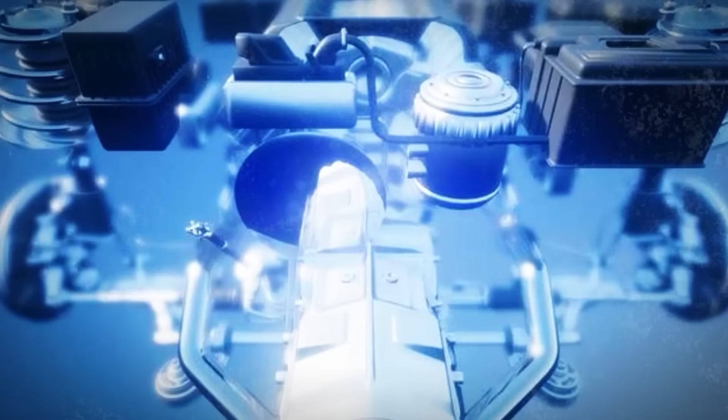Elon Musk has just unveiled a new game changer, a water engine that could completely change the way we drive and live our lives. He made this shocking revelation on X, where he announced that Tesla has made a big change.

That Tesla is shifting gears. Instead of sticking to battery-powered cars, they are now betting big on hydrogen fuel cells. Elon Musk's move has companies all over the world watching closely.

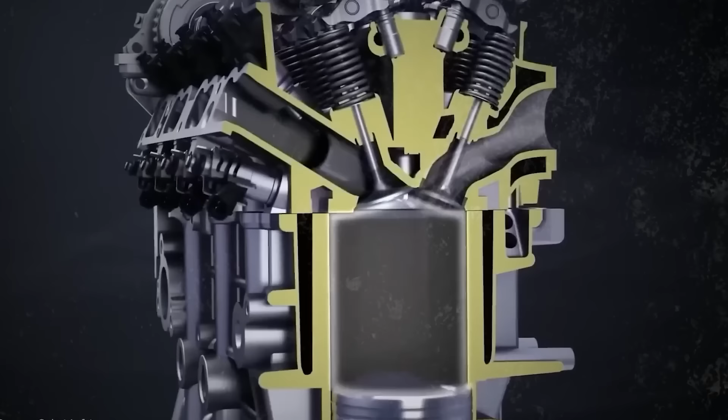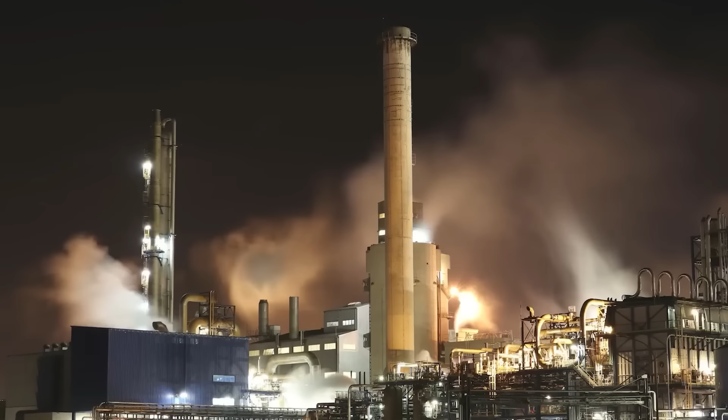This decision comes at a time when Tesla is facing challenges in mass-producing its 4680 battery cells, forcing the company to look for alternative sustainable energy solutions. So Musk is on a mission to find new, greener energy solutions. And the best part? He is introducing Tesla's water engine, which he says will be the star of this eco-revolution.

What's so amazing about this water engine? How will it shake up our world? Stay tuned. We're going to break down Musk's new brilliant move step by step and show you why it's such a big deal. Could this give the car industry a boost? Or maybe even a bigger change?

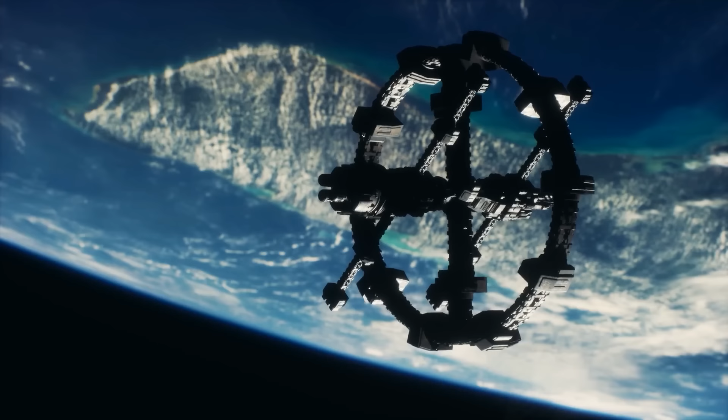Elon Musk, the big brain behind Tesla and SpaceX, is all about dreaming big and saving the planet. He's obsessed with inventing cool tech that makes life better while keeping Earth green. Musk doesn't just think outside the box. He smashes it, pushing the limits of what anyone thought was possible and earning his spot as a real-life trailblazer.

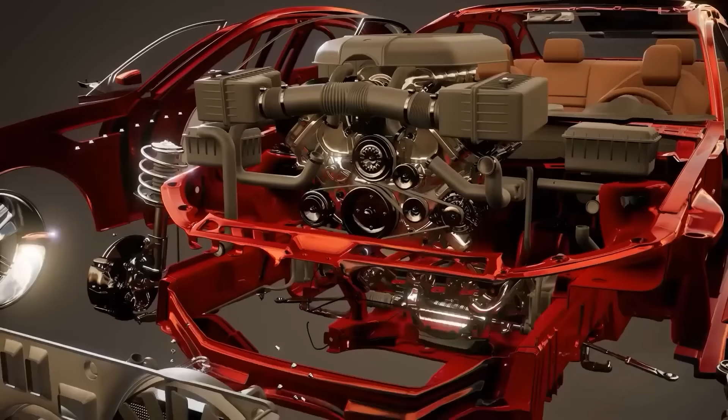With Tesla, Musk didn't just want to build electric cars, he wanted to flip the whole car world upside down. His plan? Prove that electric rides could zoom faster, stay safer, and be way more fun than gas guzzlers. But it's bigger than just cars. It's about turbocharging the world's switch to clean energy.

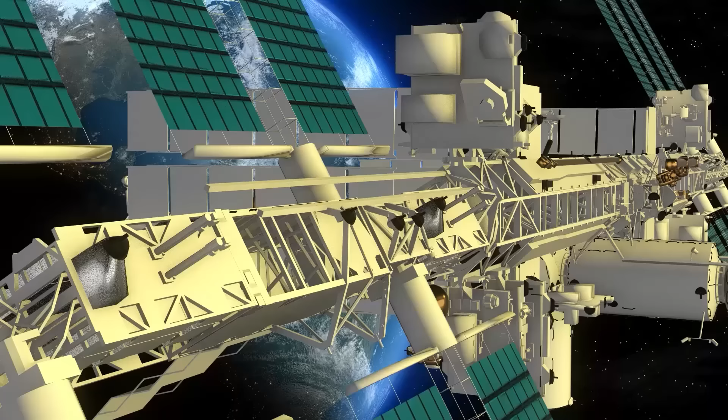And with SpaceX? Oh, he's shooting for the stars, literally. Musk's dream is to make space travel cheap and easy, with the ultimate goal of setting up camp on Mars. Thanks to SpaceX's wild wins, like landing rockets and using them again, he's already shaking up the space game and turning his crazy ideas into real stuff.

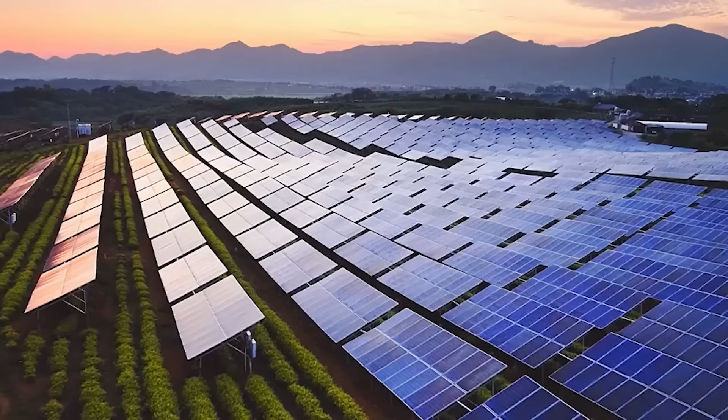Musk's adventure in green energy and transportation has some epic highlights. Take Tesla, kicked off in 2003. Back then, people laughed at electric cars, calling them slow and useless. But Musk? He just kept driving forward. Elon Musk didn't give up, and boy did it pay off.

Tesla's first big hit, the Roadster, zoomed onto the scene and showed everyone that electric cars could be fast, fun, and go the distance. Then came the Model S, Model X, Model 3, and Model Y, each one upping the game with better batteries, longer ranges, and even cars that can drive themselves a bit. Tesla's now the king of electric vehicles, making them totally practical for everyday life.

But Musk's not just about cars. He's got a green energy master plan. Tesla's Powerwall and solar roofs let homes and businesses soak up the sun's energy and store it smartly, cutting the cord from dirty fossil fuels.

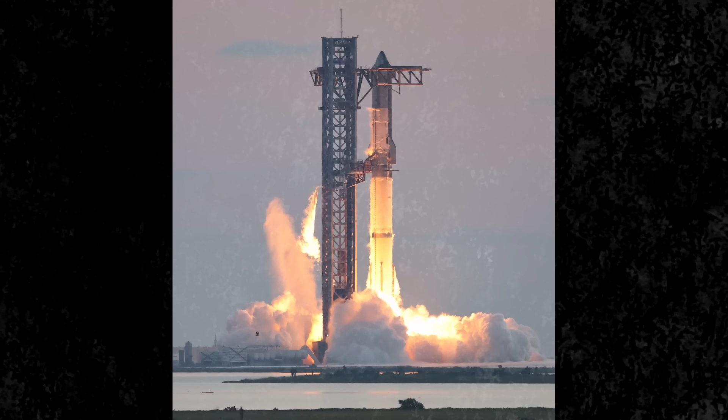And in space, SpaceX is crushing it. The Falcon 9 rocket lands and flies again, slashing the cost of space trips. Plus, Starlink's satellites are beaming internet all over the globe. Musk's basically rewriting the rules of tech.

Now, let's talk about his wild new water engine. It's super simple but crazy smart. It runs on water to make energy. Unlike old-school engines that burn gas or electric ones that need batteries, this one's different.

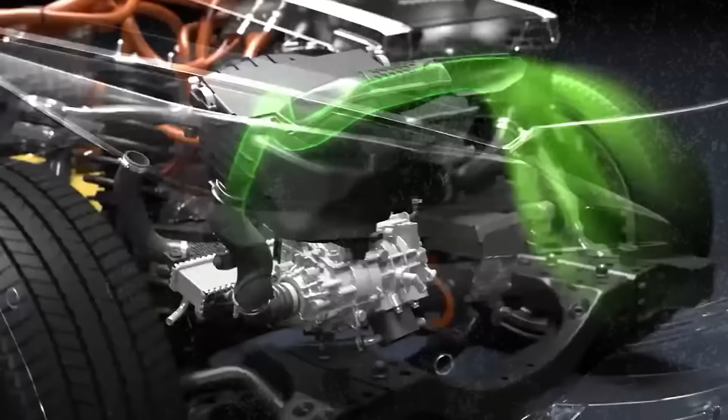How? It uses something called reverse electrolysis. Normally, electrolysis splits water, H2O, into hydrogen and oxygen with electricity. This engine flips it, mixing hydrogen and oxygen to create power, with nothing but water vapor left behind. Clean, green, and genius.

So, how does this awesome water engine actually work? It's like a magic mix of fuel cells, reverse electrolysis, and some hydrogen-oxygen teamwork. Let's break it down super easy.

First, you pour water into the system. The engine uses a little zap of energy to split that water into hydrogen and oxygen, then stores them in separate tanks inside the car.

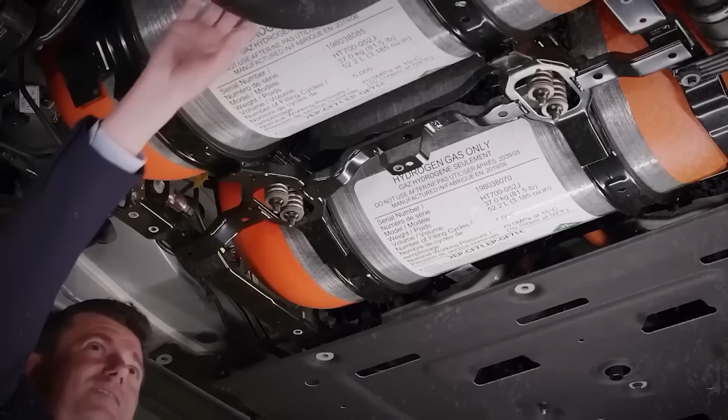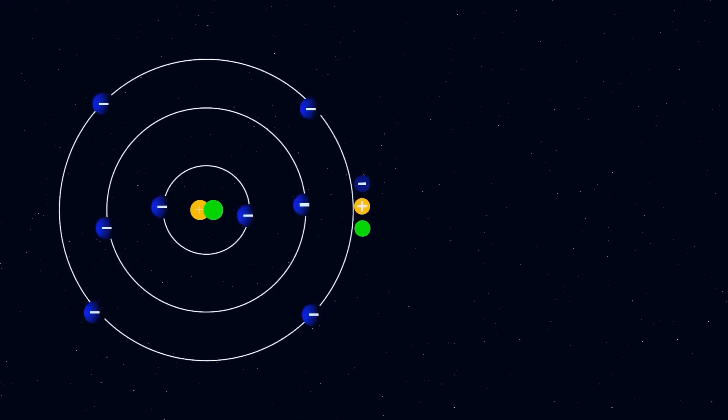When you hit the gas, hydrogen flows into a fuel cell. There, it gets split into tiny protons and electrons. The electrons zip around to make electricity, which powers the car's motor. Meanwhile, the protons sneak through a special layer, team up with oxygen from the air, and out comes water vapor. That's it, no nasty fumes, just clean steam. This setup keeps pumping out power as long as there's hydrogen and oxygen ready to roll.

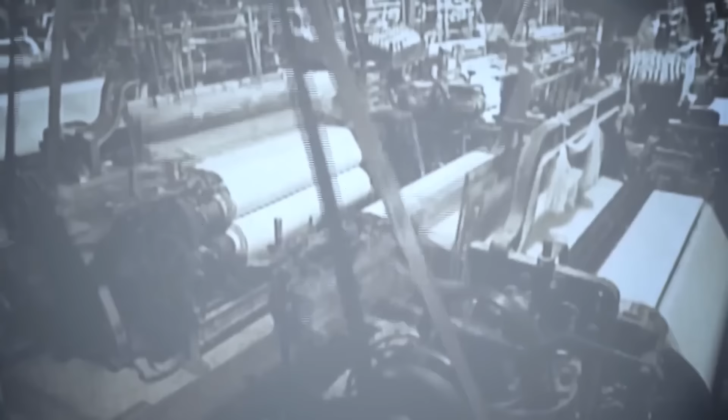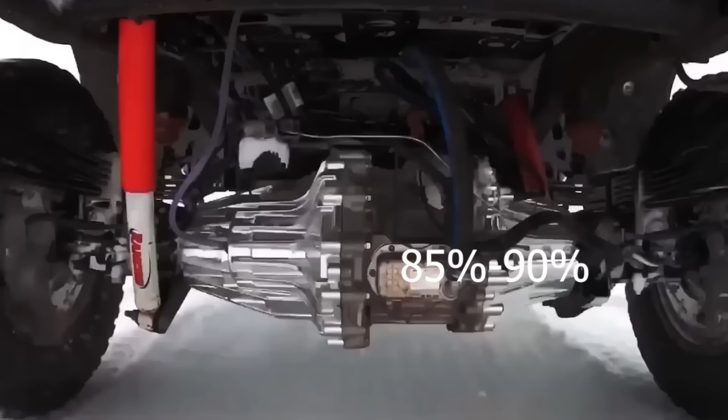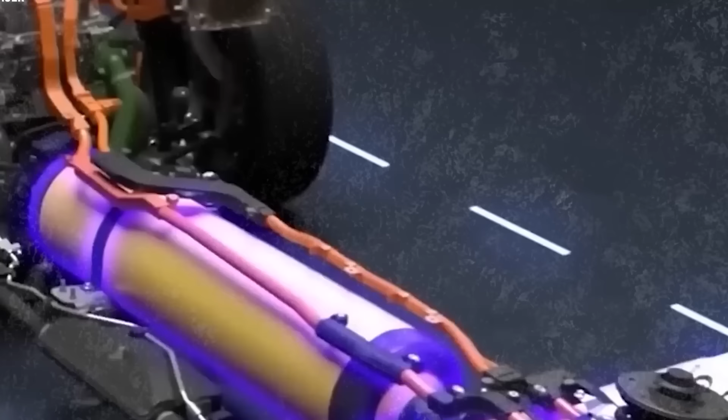But how does it stack up to other engines? Pretty darn well. Old-school gas engines only use about 20 to 30% of their energy, most of it just turns into heat. Electric engines are champs at 85 to 90%, but they've got downsides like slow charging and batteries that wear out. The water engine hits around 60% efficiency, right in the middle, but it's way cleaner and greener.

What about how far it can go? Regular electric cars often leave you sweating with range anxiety, topping out at 200 to 300 miles per charge. But the water engine, powered by hydrogen's big energy punch, can match or even beat gas-powered cars for distance. Picture this: you're cruising in a car that only puffs out water vapor and never leaves you stranded mid-trip. How cool is that? So what makes the water engine so special?

Unlike electric cars that need ages to charge, this baby refuels fast, like filling up a gas tank. That speedy pit stop, plus its planet-saving perks, makes the water engine a total game-changer for cars.

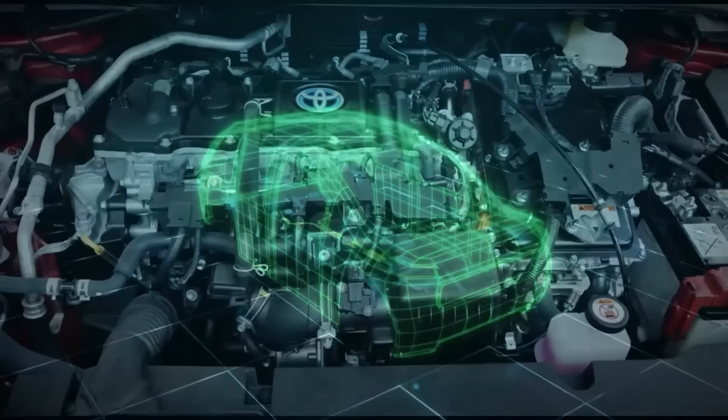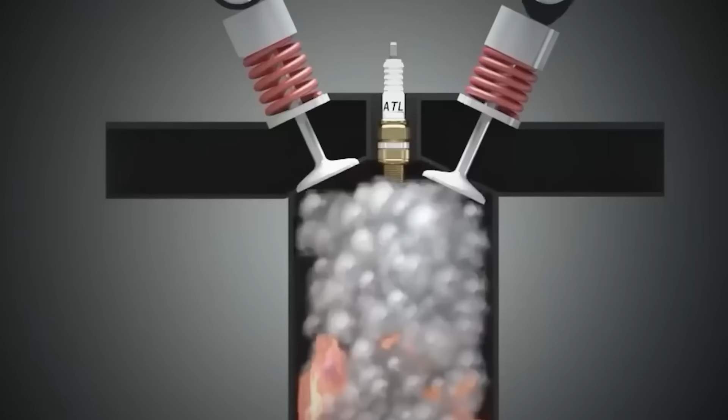Here's the big win: it could shrink our carbon footprint to practically nothing. Regular gas engines spew out tons of carbon dioxide, about 4.6 metric tons per car every year, plus other nasty stuff that heats up the planet and dirties the air. The water engine just gives off water vapor, super clean and guilt-free. Switching to it could wipe out those emissions completely. Plus, it ditches other gross pollutants like nitrogen oxides and tiny particles, making city air way fresher.

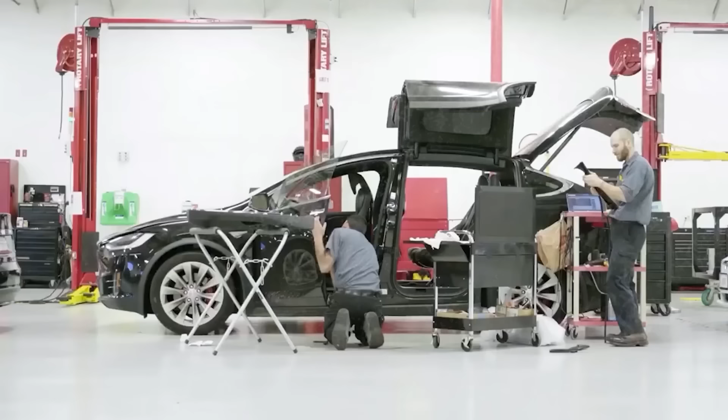Electric cars, EVs, are cleaner than gas guzzlers, sure, but they've got their own baggage. Digging up lithium and cobalt for batteries messes with the environment, and if the power to charge them comes from dirty plants, you're not saving as much carbon as you'd hope. Hydrogen fuel cells are another green option, also making just water, but creating hydrogen often uses natural gas, sneaking in some carbon emissions. Plus, storing and moving hydrogen is tricky because it needs big, high-pressure tanks. The water engine, though, it's stepping up as a cleaner, smoother ride into the future.

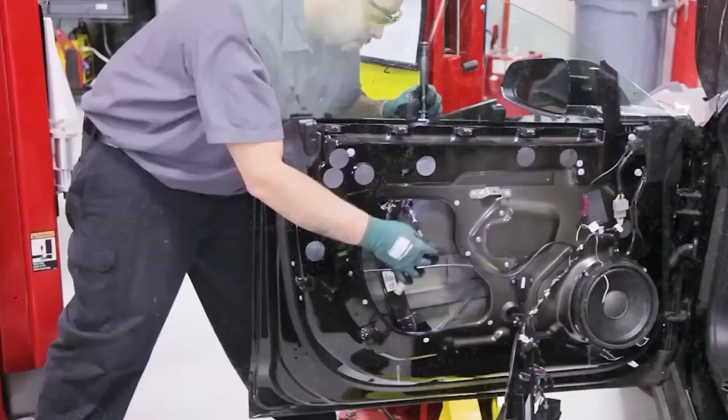The water engine, with its reverse electrolysis trick, could be a total win, super efficient and kind to the planet. By using renewable energy, like solar or wind, to make hydrogen, it keeps the whole process green from start to finish, slashing its eco-footprint. Plus, it could save you some serious cash over time.

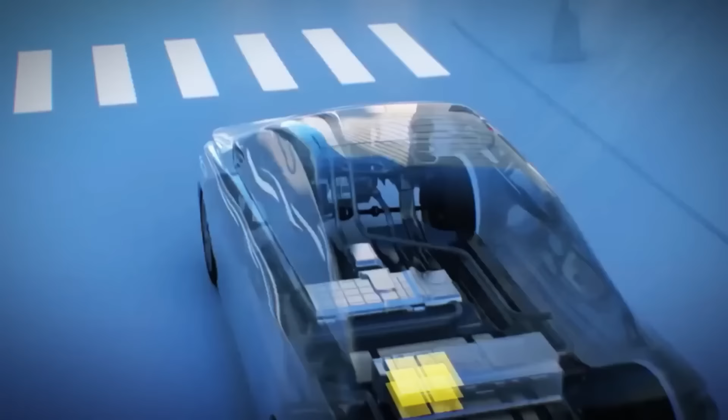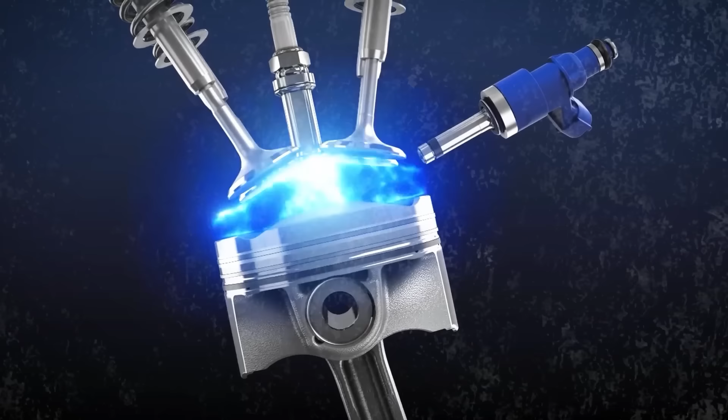Old-school gas engines need constant tune-ups, oil changes, exhaust fixes, you name it, which adds up fast. Electric cars cut down on repairs with fewer moving parts, but those pricey battery swaps can sting your wallet and the environment. The water engine? It's simpler, with less stuff to break, so repairs could be cheaper and rarer. Its fuel cells and systems are built to last, meaning your car might stick around longer. As more people jump on board and the tech gets cheaper to make, water engine cars could become affordable for everyone, not just the fancy folks.

But here's the catch: switching to water engines won't be cheap or easy at first. We'd need a whole new setup of refueling stations, either brand new ones or upgrades to the ones we've got. That's a huge project, and it'll take big teamwork between companies and governments to pull it off.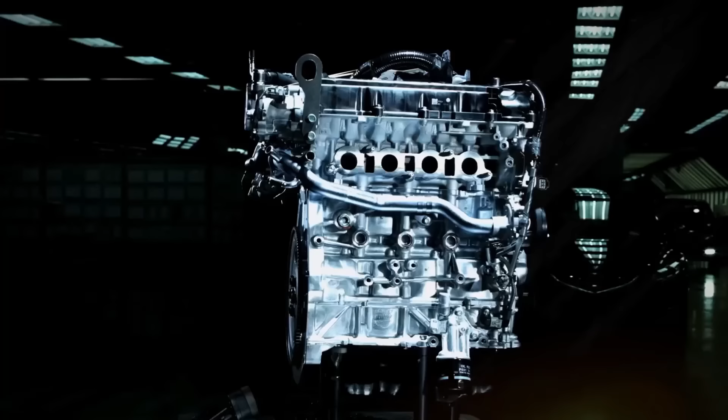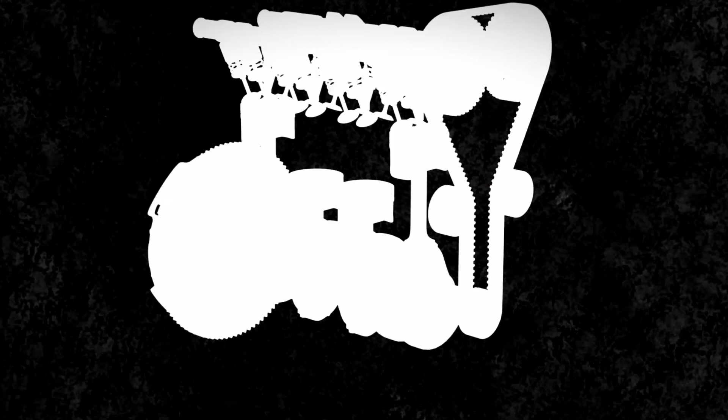On the flip side, if we make it work, we could kiss oil goodbye. That means steadier fuel prices, less fighting over oil, and tons of new jobs building water engine tech and stations. This is a massive shakeup for the car world, moving from gas guzzlers and electric rides to water-powered wonders. It's not simple, though. The whole industry's built around fossil fuels, from factories to gas stations. But here's the good news.

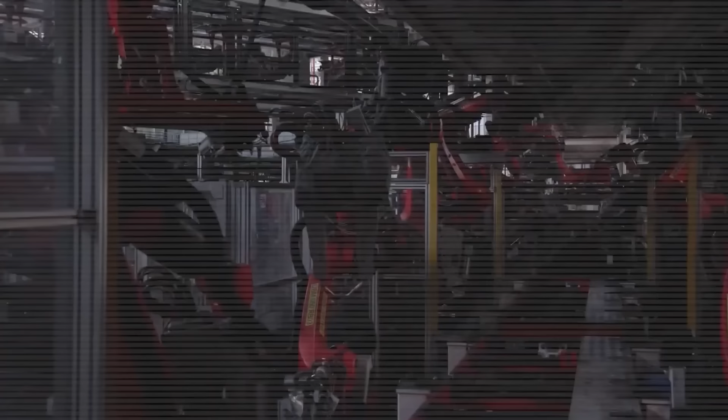Companies can borrow tricks from hydrogen fuel cell tech, like how to store hydrogen or design fuel cells, to speed things up. So what's next for Musk's water engine? Will it change how we power our lives and hit the road? Or will it hit too many roadblocks?

The car world is buzzing after Musk's big water engine reveal. Big names like Toyota and Hyundai, who've been all about hydrogen fuel cells for years, are keeping a close eye. Toyota's been rocking hydrogen with cars like the Mirai, and they're pumped, seeing Musk's move as a high five to their belief that hydrogen's the future. They think it could spark more cash and stations for hydrogen tech.

Hyundai, with its Nexo, is excited too, but playing it cool. They love the competition, but know there's still a ton of work to make hydrogen and water engines a real thing for everyone. Experts are split on this water engine idea.

Some think it's a genius leap toward greener energy, super exciting. Others aren't so sure, scratching their heads about how efficient it'll be, how we'll build all those water refueling spots, and whether it'll actually work money-wise.

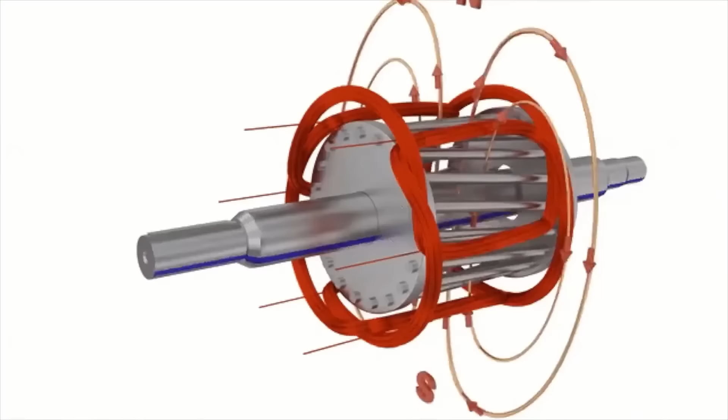People online? They're all over the place, too. Musk fans and Tesla lovers are hyped, dreaming of a cleaner, zippy engine that's great for the planet. But not everyone's sold. Some remember Musk trashing hydrogen before, and wonder if switching to water engines this fast is even doable. Plus, those new stations and startup costs? Yikes! So will Musk's water engine be the superhero it claims to be?

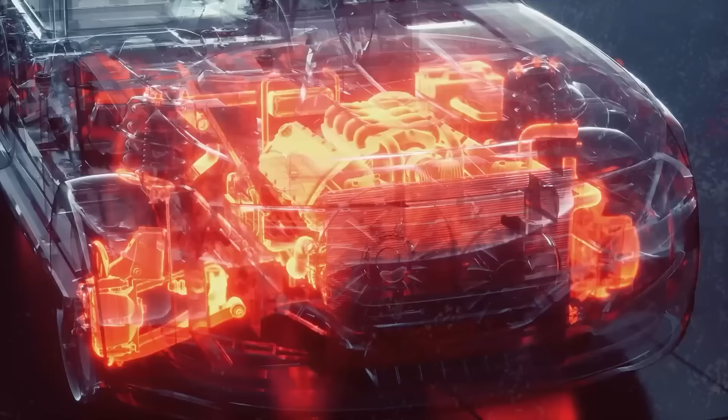One huge hurdle is figuring out how to set up refueling stations everywhere. Gas stations? They're on every corner. Electric car chargers? Growing fast thanks to Tesla and others, but water engines need a whole new network. And that's a big, wild challenge.

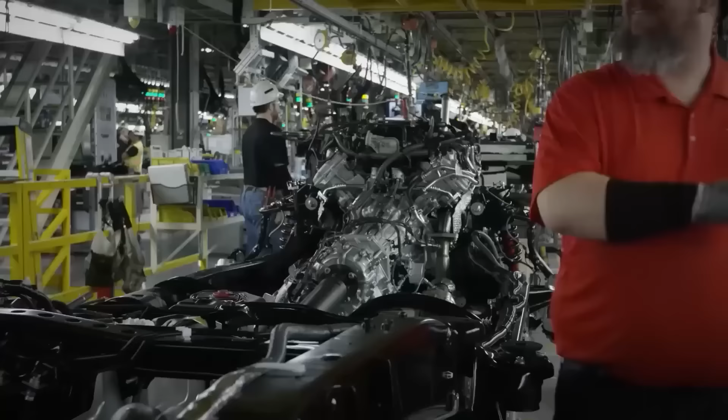Right now, hydrogen fuel stations are pretty rare, way behind gas stations or even electric car chargers. You'll mostly find them in places like California, Japan, or parts of Europe. Water engines, which use hydrogen too, can piggyback on these spots, but we'd need a lot more to make it work everywhere.

Tesla's got a plan, though. They're experts at building supercharging stations for electric cars, and they want to tweak those to handle hydrogen, plus build brand new ones just for water engines. It's a huge idea, but it'll take big bucks and teamwork with governments and companies to make refueling easy for everyone.

So how fast can they pull this off? And what about the money and headaches along the way? Those are the million-dollar questions as Tesla races to get water engines on the road.

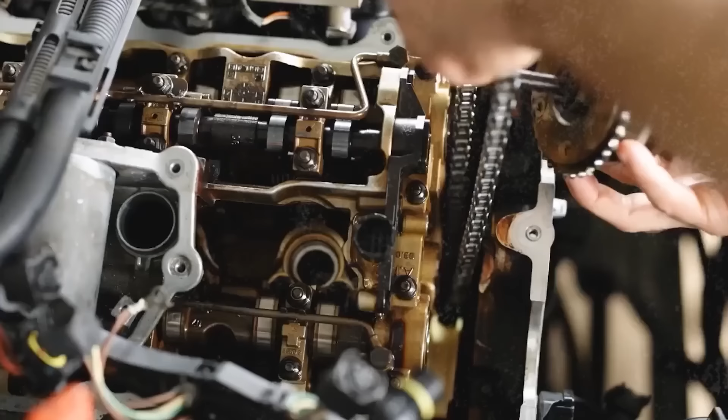Safety's a big deal too. Hydrogen's super clean, but it's also super flammable, so you've got to be careful. Since water engines use it, Tesla's tackling that head-on. They've built tough, leak-proof storage tanks to keep hydrogen locked up tight in the car, even under crazy pressure. Plus, they're testing everything like crazy to make sure it's safer than safe, meeting all the big global rules.

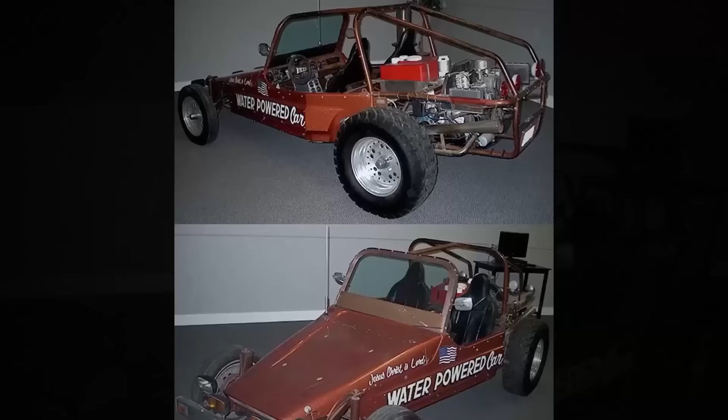Tesla's all in on keeping this tech secure, but will that be enough to calm everyone's nerves? How do we make sure people trust this water engine and feel safe with it?

That's the big question. Tesla's also got a tricky puzzle to solve with rules and laws. Every country has its own playbook for handling hydrogen, from making it to moving it around. It's a global headache. But Tesla's on it, chatting with regulators everywhere, doing tons of tests, and piling up paperwork to follow all the rules. They're keeping the conversation going to tweak things as needed.

So what's tough in different places? And will Tesla's hustle make water engines a worldwide hit? Let's find out. Every tech has its superpowers and kryptonite.

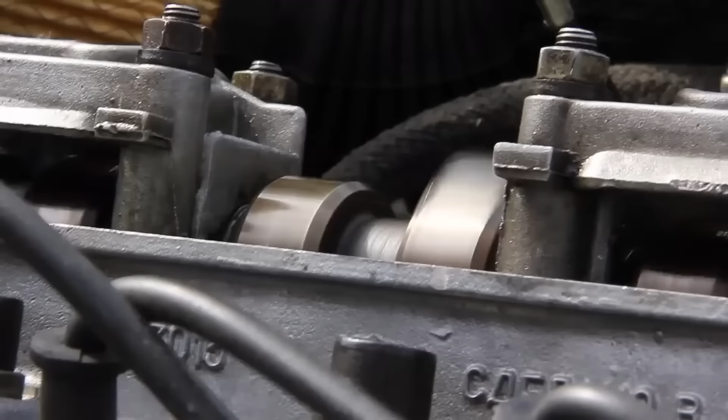Hydrogen fuel cells? They pack a ton of energy, so you can drive far and refuel fast. Plus, they only puff out water vapor, which is awesome for the planet. But the downside? Hydrogen's a fiery handful to make, store, and ship, needing special setups.

Water engines, though, have a cool trick. They whip up hydrogen right when you need it, making storage simpler and safer. They also play nice with green energy like solar or wind, boosting their eco-cred. The catch? That reverse electrolysis magic needs a big energy kick to start, which can dent efficiency a bit.

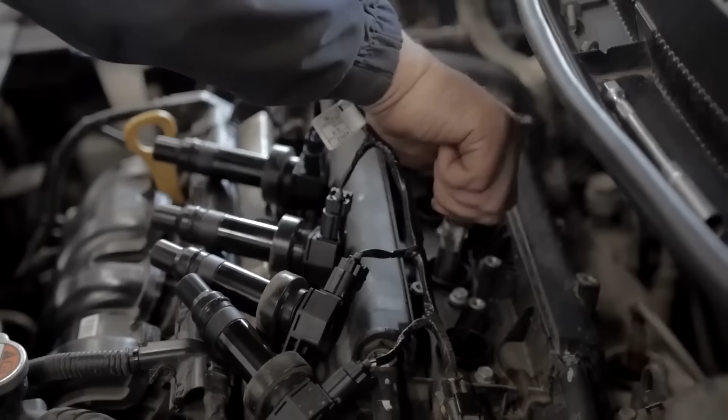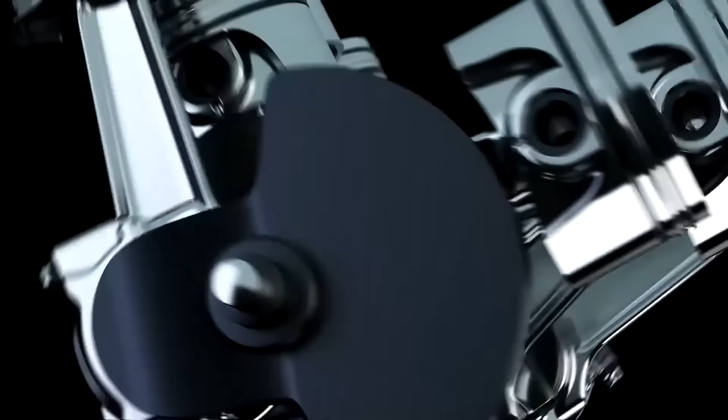The future for water engines looks bright, but it's no cakewalk. Car makers are all about cutting pollution, and governments are cracking down with tough emissions goals and sweet deals for clean tech. Figuring out how fast people will jump on the water engine bandwagon depends on a few big things: how slick the tech gets, how many refueling stations pop up, and whether folks are ready to give it a spin.

At first, it might just catch the eye of tech geeks and eco-warriors, but experts say, as it gets better and cheaper, more people will hop on board, maybe even taking over a big chunk of the car market in the next 10 years. That's if Tesla can iron out the kinks in efficiency and build enough stations and cars to go around. Teaming up with governments and businesses will be key to making it happen.

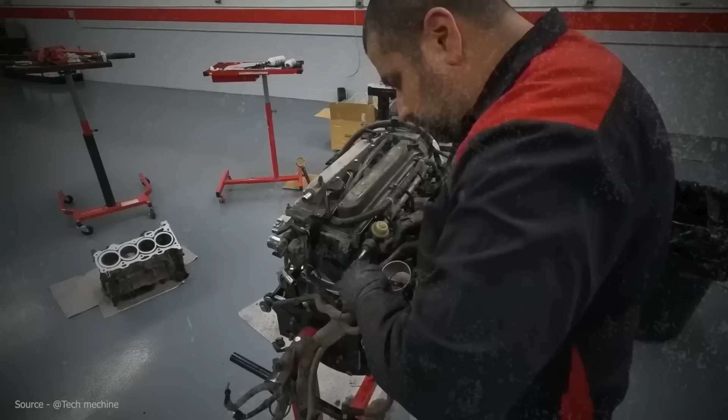So, what's it going to take for water engines to totally shake up transportation? How will they stack up against the big dogs and ride the wave of green energy? Let's zoom back in time for a sec.

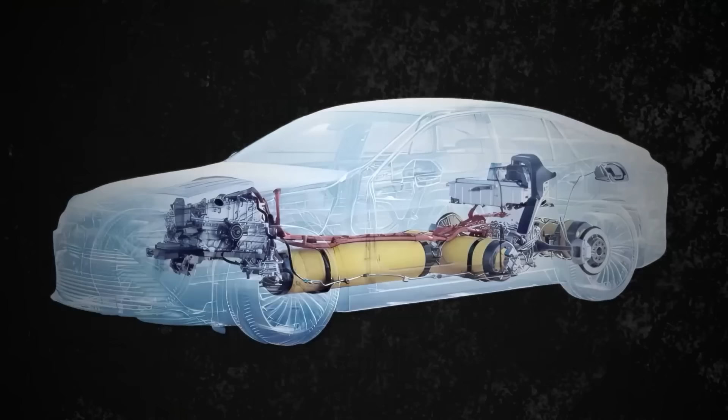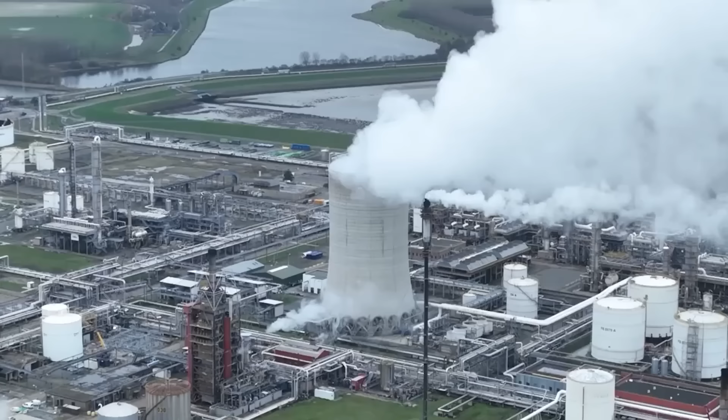Engines started with the steam engine way back in the late 1600s. Guys like Thomas Newcomen and James Watt made them awesome, powering trains, ships, and factories, and kicking off the Industrial Revolution. Then, in the late 1800s, the internal combustion engine rolled in, thanks to brainiacs like Nicholas Otto and Rudolf Diesel. Otto's four-stroke engine and Diesel's power-packed design became the blueprint for today's gas and diesel rides, super strong and everywhere, from cars to planes to boats.

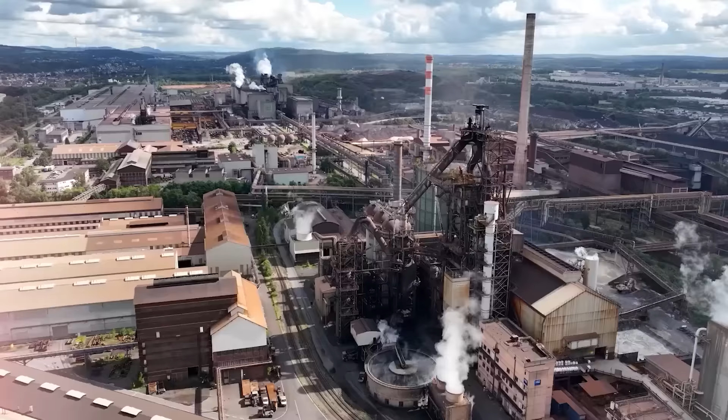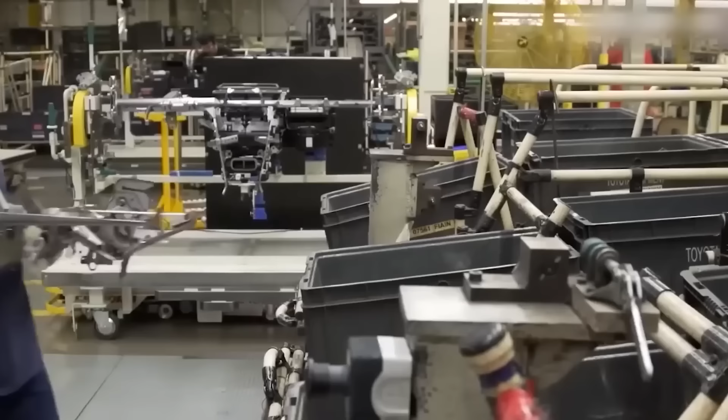In the 1900s, these engines got even cooler with better materials, fuel injectors, and turbo boosts, making them faster, thriftier, and a bit cleaner. But as worries about pollution and running out of oil grew, people started hunting for something new. That's where electric cars started revving up in the late 20th and early 21st centuries.

Elon Musk and Tesla kicked off the electric vehicle, EV craze, making huge leaps in battery power, driving distance, and charging stations. But before Musk's wild water engine idea, people tried all sorts of other fuel tricks.

Back in the 1960s, NASA used hydrogen fuel cells to power Apollo spacecraft. Pretty cool, right? It showed hydrogen could work, but bringing it to everyday cars hit big roadblocks. Making it, storing it, and building places to refuel were a mess.

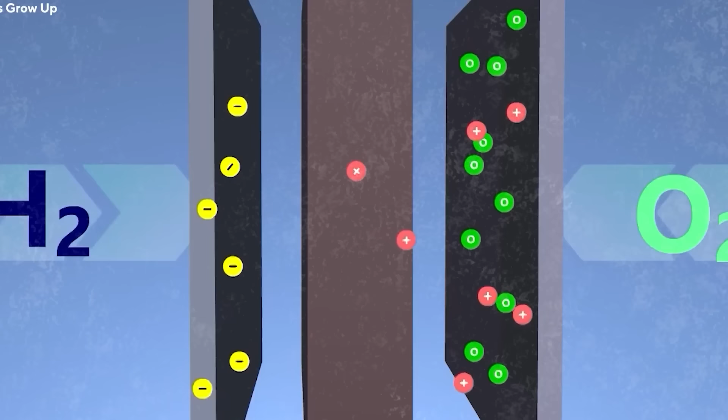Then, in the early 2000s, biofuels like ethanol and biodiesel, made from plants and waste, got hot. They were renewable, which was awesome, but growing them gobbled up tons of land and water, sparking worries about food shortages and the planet. Electric cars also had their moment.

Think General Motors' EV1 in the 90s. They showed EVs could roll, but short ranges, high prices, and nowhere to charge kept them in the slow lane. It took better lithium-ion batteries and a web of chargers to finally get EVs zooming.

These past tries teach us big lessons for Musk's water engine. One: you need good infrastructure. Hydrogen and early EVs flopped without it. Musk's fix? Use Tesla's supercharger network and tweak it for hydrogen refueling.

Another lesson: efficiency matters. Biofuels sometimes burned more energy to make than they gave back. Not cool. Musk's water engine tackles that with reverse electrolysis, aiming to split water and mix hydrogen and oxygen as smartly as possible. So where does the water engine fit in? It's the newest chapter in the hunt for clean, green engines, learning from what worked and what didn't before.

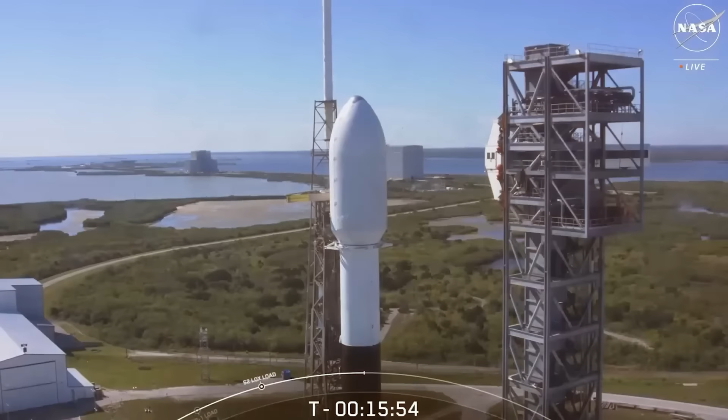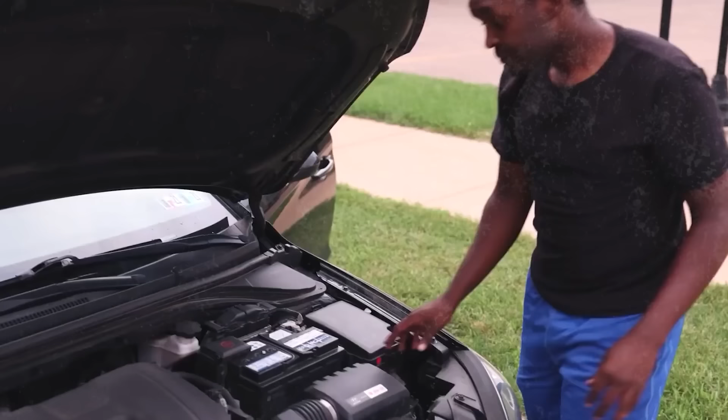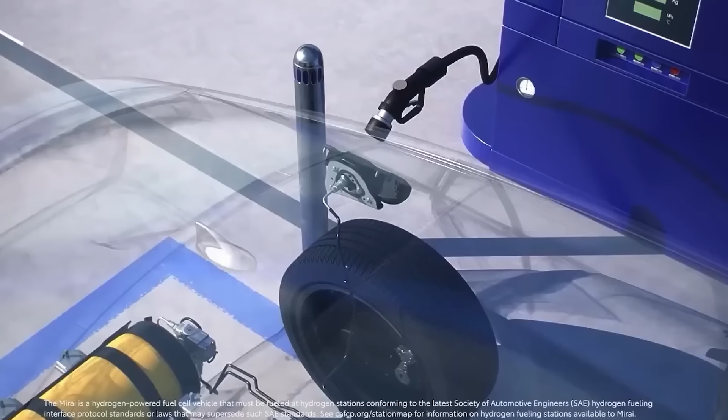Musk's pushing the limits again. But he's not alone. Companies like Nikola Corporation are in the game too, building hydrogen-powered trucks. Even after some bumps in the road, Nikola's been charging ahead, building heavy-duty trucks powered by hydrogen fuel cells. They're aiming at big businesses, which could give Tesla some serious competition, especially for long-haul trips.

BMW's in the mix too, testing out hydrogen fuel cells with cool prototypes and their top-notch engineering. With their fancy brand, they might steal some thunder from Tesla's water engine, especially in the luxury car scene. Then there's Rivian, a hot electric vehicle startup with big backers like Amazon and Ford. They're all about EVs right now, but with their cash and creativity, they could switch gears to water engines if the buzz gets loud enough.

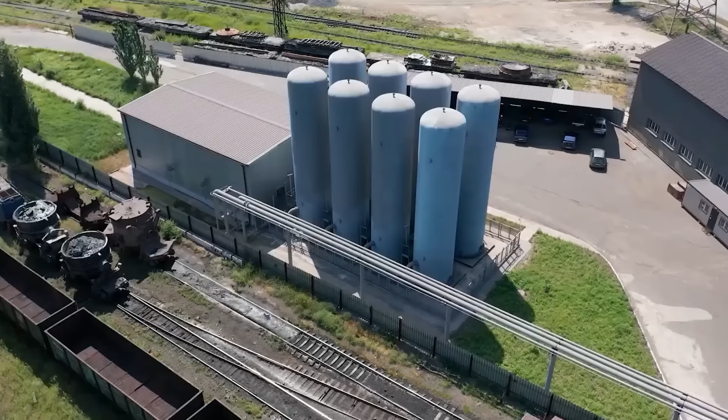Teamwork's the secret sauce for making water engines a big deal fast. Tesla's great at making smart partnerships. Think top tech companies, universities, and research crews. These hookups bring in brainpower, cutting-edge ideas, and the latest tech.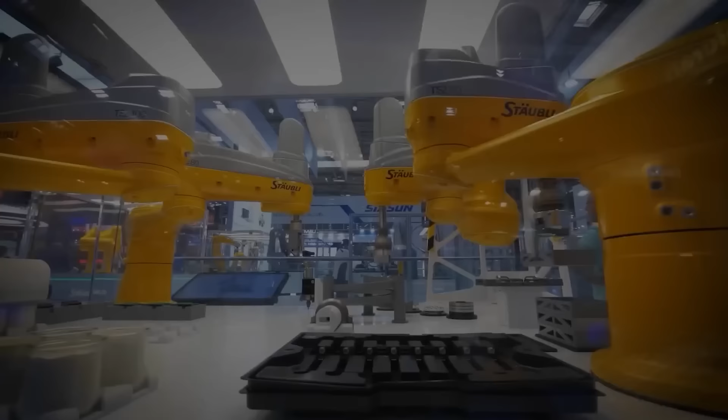Imagine Tesla teaming up with hydrogen-smart universities to make the water engine even better, or linking with giants like Google or Apple to add slick software and AI, making these cars super smart and fun to drive.

So, how will these team-ups change the way we roll? Could Tesla's buddies help water engines take over the roads?

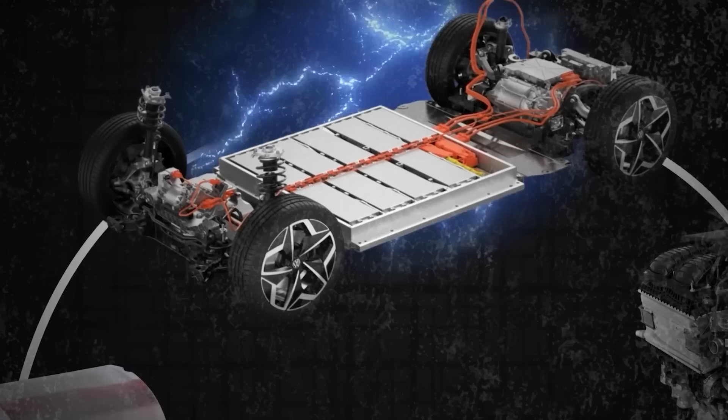One of the coolest things about the water engine? It plays perfectly with green energy like solar and wind. Using clean electricity from solar panels or wind turbines, it splits water into hydrogen and oxygen through electrolysis. That means hydrogen power with almost zero planet-harming emissions.

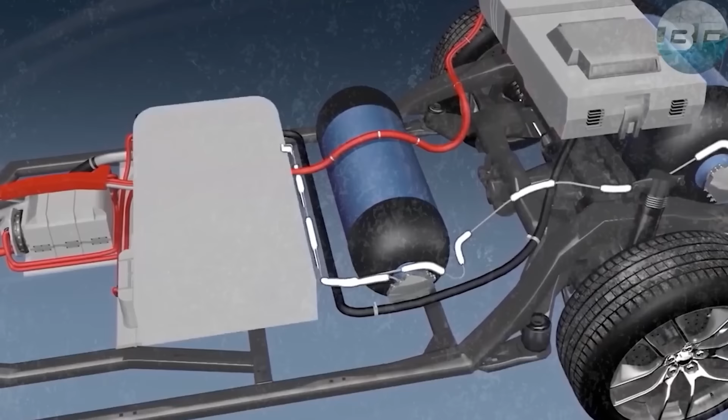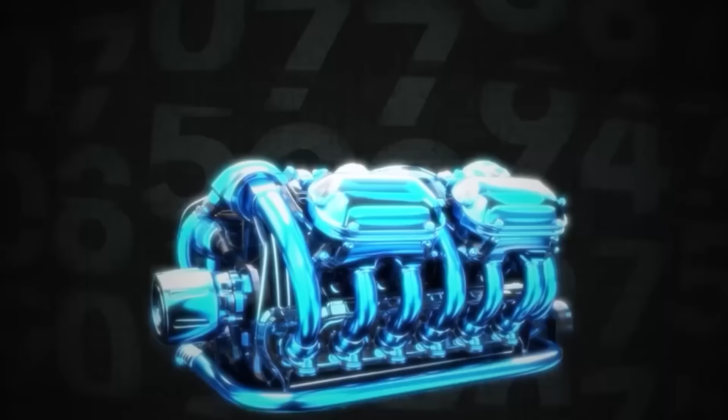Total eco-win. Picture this: your house has solar panels soaking up the sun all day, making hydrogen fuel to power your water engine car. Or imagine wind farms spinning away, pumping out electricity for your lights and hydrogen for your ride. It's like renewable energy and green transportation teaming up for the ultimate high five.

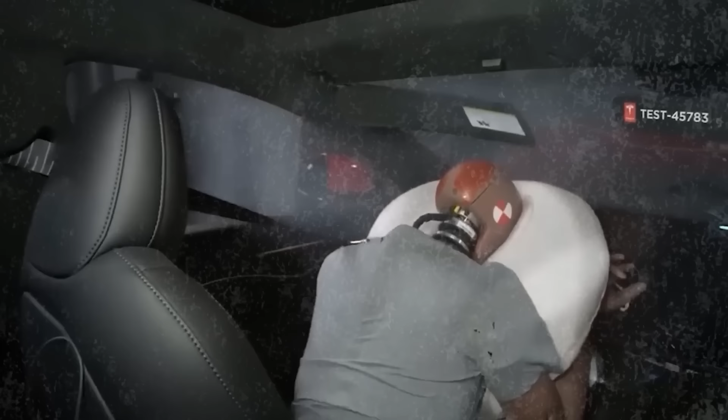This could totally shake up how we use energy. Hydrogen can act like a giant battery, grabbing extra power when the sun's blazing or wind's blowing, then turning it back into fuel or electricity when we need it most. That keeps the power grid steady and makes green energy even more reliable, no matter the weather.

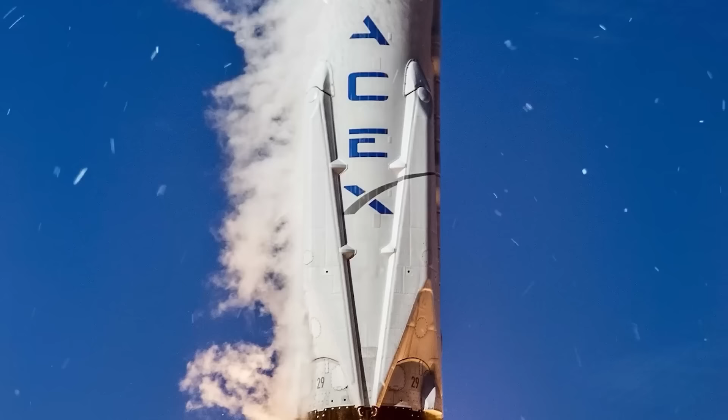If water engines take off big time, they could be a game changer for the planet. By ditching fossil fuels, they'd slash greenhouse gases and dirty air. Hello, cleaner skies, healthier people, and a happier Earth.

Plus, pairing water engines with renewable energy fits perfectly into the mission to zap carbon out of our energy system. It could speed up the switch to a super green world by boosting clean hydrogen and sparking more hydrogen stations.

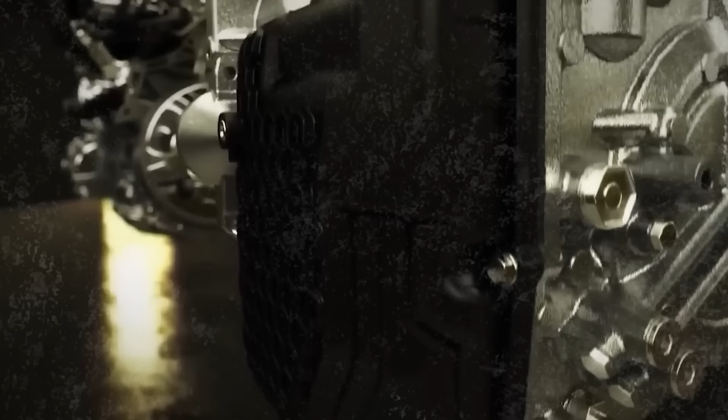Elon Musk's water engine might even rewrite the rules for global energy. As countries race to hit climate targets and cut emissions, this tech could nudge them to make big moves. Think government goodies like tax breaks or cash to build refueling spots and crank out green hydrogen, pushing the hydrogen revolution into overdrive.

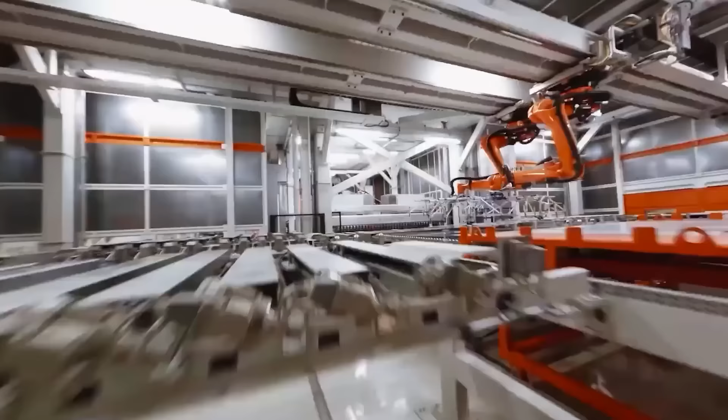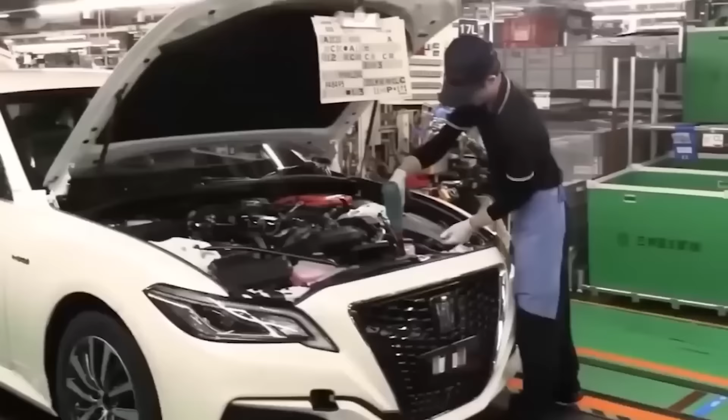Governments could jump in with cool perks, like cash bonuses for buying hydrogen-powered cars or funding to make the tech even better. That'd supercharge the switch to green energy, getting more people on board and building out the stations we need.

Plus, the water engine is set to make driving way more awesome. Unlike those loud, shaky gas engines, water engines, kinda like electric cars, run super quiet and smooth. That means less racket on the road, a chill ride, and happier ears all around.

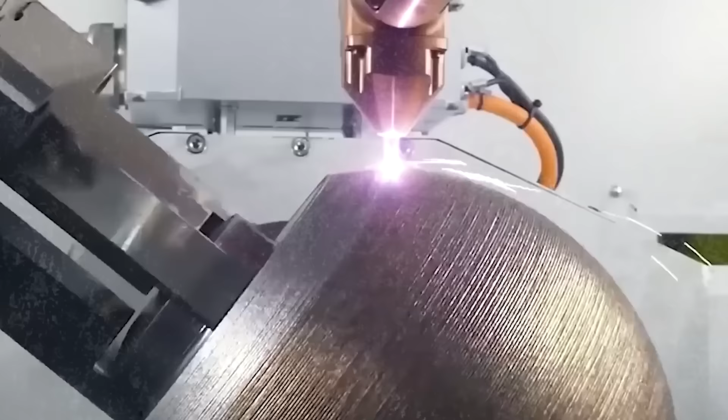Performance-wise, water engines are snappy. Just like electric cars, they hit the gas and go with instant power. It's a blast to drive, and since they're super clean, you can zoom around without any eco-guilt.

Money-wise, they're a win too. As the tech gets cheaper to make, water engine cars should cost less upfront. Add in government deals and lower fuel bills, and your wallet's smiling big time.

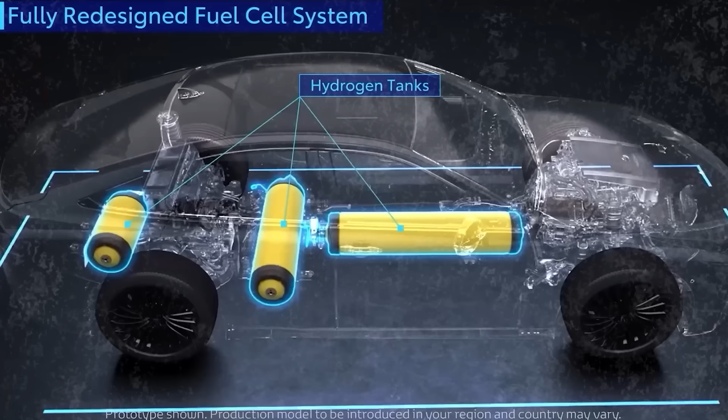But wait, water engines aren't just for cars. Tesla's dreaming bigger, like using them in planes to cut aviation's carbon mess. Picture hydrogen-powered jets that are just as green as these cars. Talk about a sky-high revolution.

Ships could get in on it too, sailing with water engines to clean up the seas and air. Even heavy industries with huge energy needs could swap fossil fuels for this sustainable switch, slashing emissions like champs.

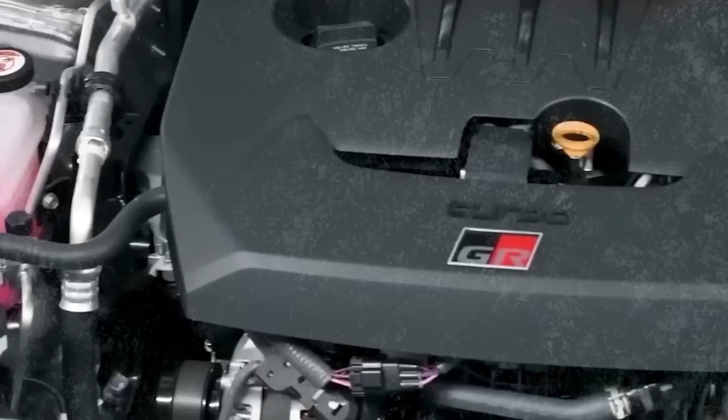And that's a wrap on Elon Musk's wild water engine adventure. From quieter rides to cleaner skies, and maybe even planes and ships, this tech could flip the script on how we move and power our world.

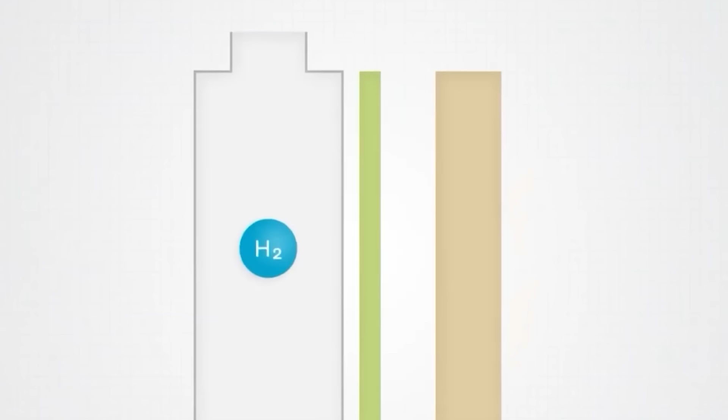Will it zoom us into a green future, or hit some speed bumps along the way? Stick with us to find out.